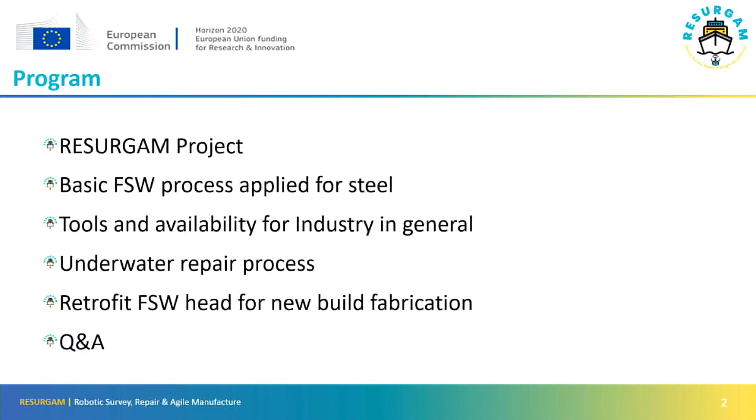So I'll start with the project overview. I did not present myself, but I'm from EWF. We are the project coordinators.

So the Resurgam project is more or less in the middle of activities. We started in February last year, and we are going through until the beginning of 2024. We have a budget a little over 6 million.

Basically, we are trying to come up with different solutions for the maritime industry. The idea is to pick up a process, the friction stir welding process, that was usually used in aluminum friction stir welding, and trying to diversify it for steel.

And also to have two different solutions for modular fabrication and also for repairs, both in dry dock and offshore. So this is quite ambitious. We already have some breakthroughs that we are starting now to really communicate and disseminate into the industry.

The project is mainly for the maritime industry. Nevertheless, all the developments, both in technologies and solutions, could easily, I think, be translated into different industries. We have the automobile industry here. We can also think about different applications for other industries, and in the project business plan after the project, we are considering different industries as well.

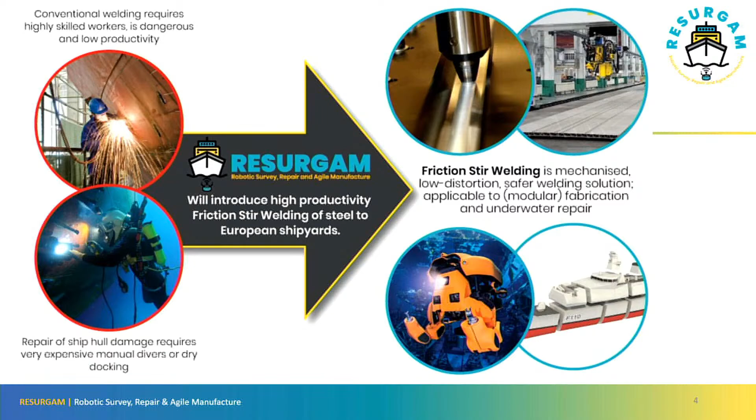We also have GISBIR. We have two participants from GISBIR here today, from the Turkish Shipbuilders Association. We also have the Spanish Shipbuilding Association in Galicia, which is ACLUNAGA. And then we have research organizations also present here: TWI, very well represented by Stephen, Lancaster University, Limerick University, and Delft University, also with a member present here.

And then, because this is for industry, we have Ford with Chris, Element 6 (unfortunately not here), ESSI from Greece and Cyprus, and also Stirweld with Pierre here, who is also going to present a little bit about the company. So the main challenge for the project.

The ongoing competition from shipyards around the world, mainly with new players from Asia, and the shipyard repair processes that are still expensive, require highly qualified personnel, have high-risk procedures, and are often inefficient and time-consuming.

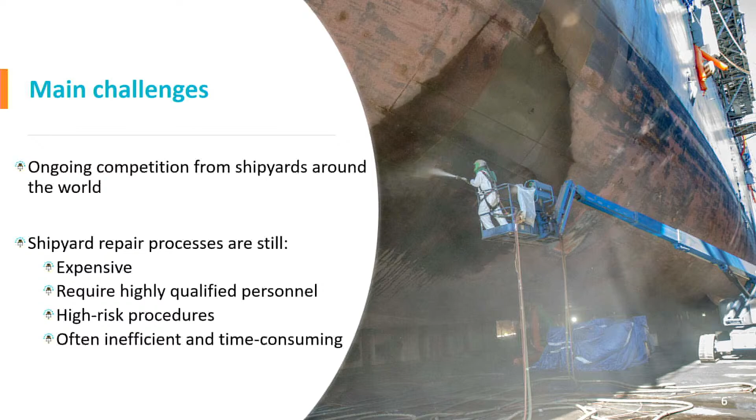So we have work to do. As key objectives in the project, we are hoping to enable the use of friction stir welding for underwater and under-oil welding of steel. By the end of this presentation, you will all know what FSW means.

Deliver a prototype underwater FSW head capable of robotic deployment - which we are not going to present today, but in the upcoming months it will be a reality. And an artificial intelligence enabled robotic underwater FSW system capable of performing inspection and friction stir welding underwater and in confined spaces, which could also be important for different industries.

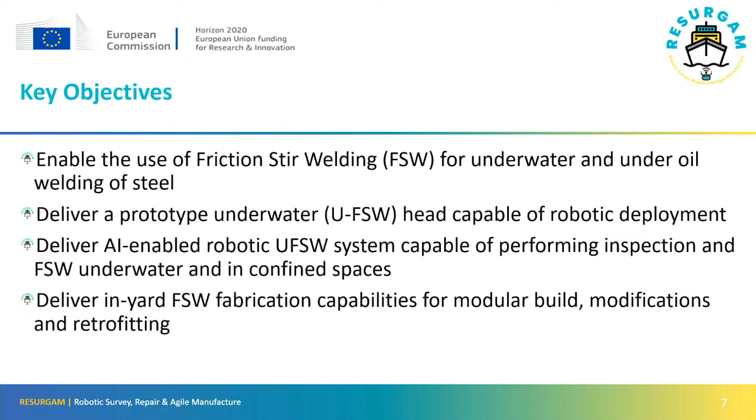And deliver an in-yard friction stir welding fabrication capability for modular build, modifications and retrofitting, which will be covered in more detail in the last presentation from Stirweld.

The outcomes of the project: so in a year and a half from now, we should be able to adapt friction stir welding to a new medium, the liquid one, and a new material, steel, instead of aluminium. The Resurgam digital platform to have some control of the process, mainly in offshore processes.

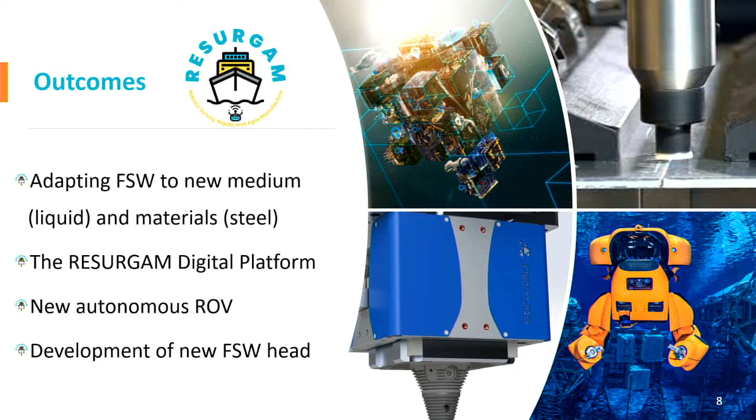The new autonomous robotic ROV, the robotic vehicle, yeah. And the development of the new friction stir weld head that is able to connect with a CNC machine in any shipyard and enable modular fabrication or maintenance repair of some kind of injury. So this is my presentation, a brief overview of the project.

We are now going to proceed with Stephen, who will kindly present the TWI presentation and also the Element 6 presentation. Stephen is a principal project leader at TWI, our expert in welding, friction stir welding to be more exact. He is a materials engineer and also a composites engineer. He is a fellow of the Royal Institute of Navigation, an associate of the Royal Institute of Naval Architects, and an associate of the Welding Institute.

So, Stephen, would you like to proceed? We are going to start on a high note with a video. Yes, watching a video is more interesting than listening to me.

So, a brief introduction to TWI. TWI is the Welding Institute, a professional organisation that maintains standards for welders in England and provides training courses - very much like the Institute of Engineers here. But in addition to that, we also have a research arm, with over 600 staff who specialise in materials engineering and welding research. So we actually do get our hands dirty at times and do some work.

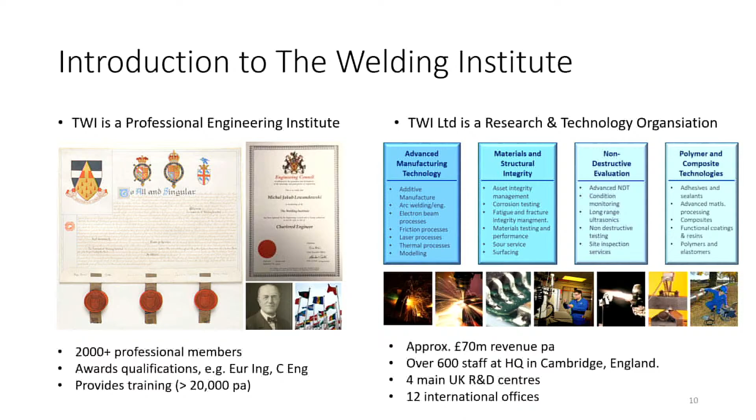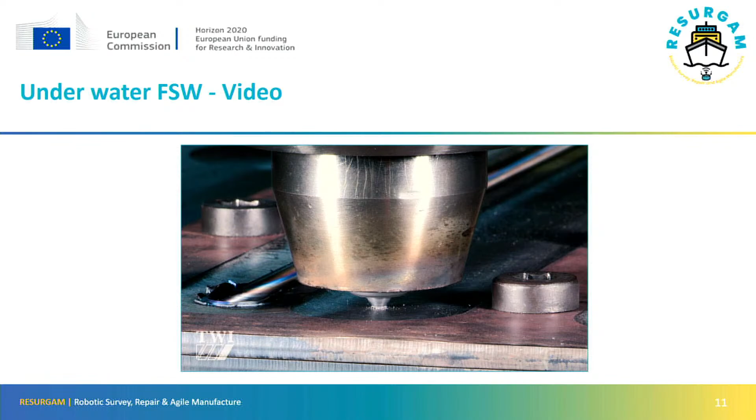So this will explain to you what friction stir welding is. Friction stir welding is a solid state welding process, originally invented by TWI in 1991 and widely used worldwide for the manufacture, firstly, of aluminium, then magnesium, copper and titanium fabrications. Under the Resurgam project, the process is now being further developed to enable the welding of steel for the European shipbuilding sector.

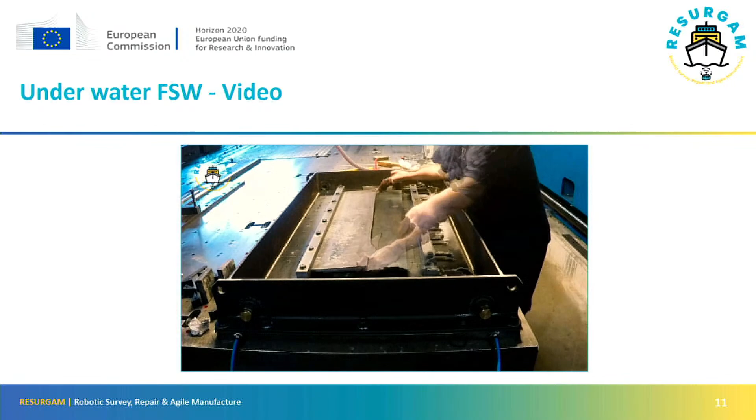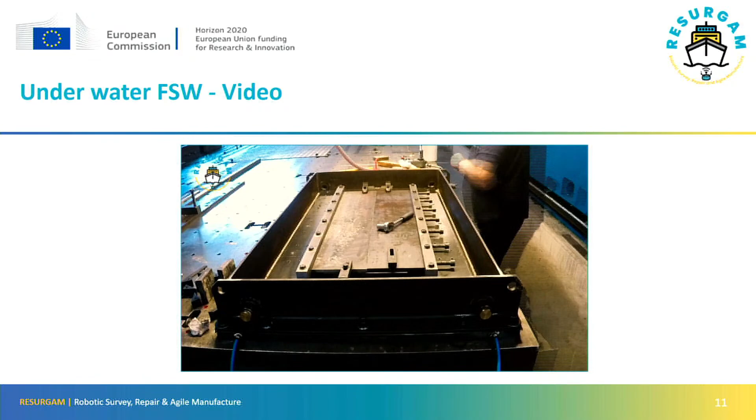In the short video running now, we see a test coupon of 12mm thick carbon steel being butt welded from two separate plates in TWI's laboratory. The steel plates are first secured side by side in the welding jig. The plates have simple square butting edges - there's no need to undertake a V-groove preparation for friction stir welding.

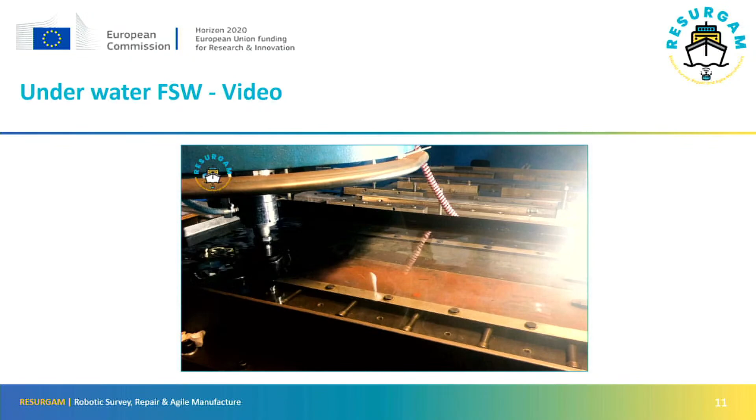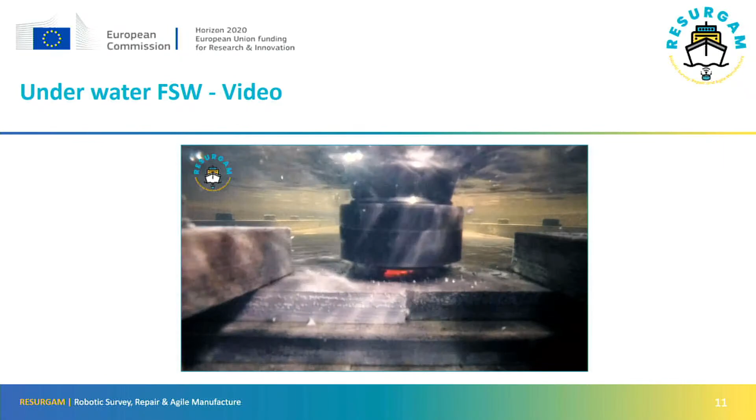The fixture is then flooded with water and the friction stir welding tool is brought down into contact with the plates. The friction welding tool is provided by consortium member Element Six and is being developed for welding steel up to 12mm thick, in air, or, as can be seen in this case, underwater.

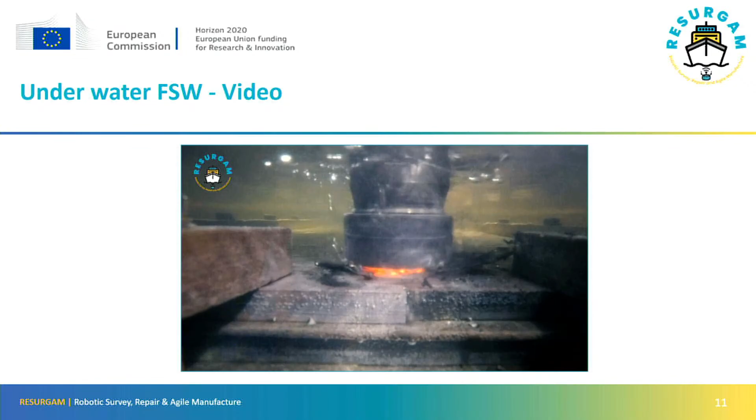As the friction stir welding tool rotates, it begins to generate heat, softening the steel immediately beneath it and embedding itself into the steel. Bubbles of steam can be seen originating from the contact area between the tool and the steel being welded. Once sufficient heat has been generated to soften the steel, the tool begins to traverse along the joint line, stirring the metal and joining the two plates together. Once the weld is complete, the fabricated test coupon is removed from the water tank.

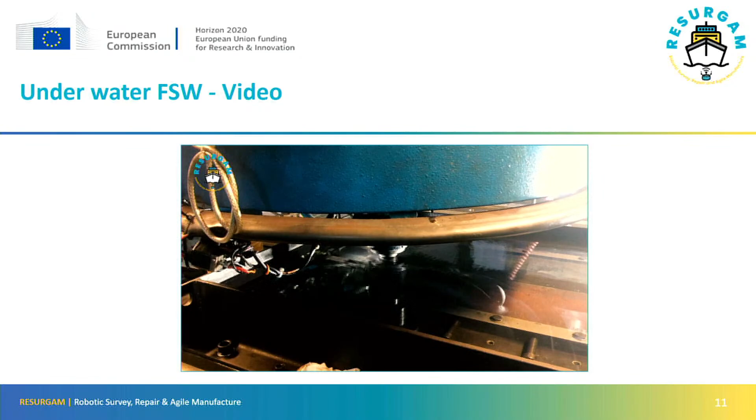As can be seen, the weld is smooth and free from spatter. The lack of distortion allows a 1 metre long steel rule to be balanced on its edge along the plate.

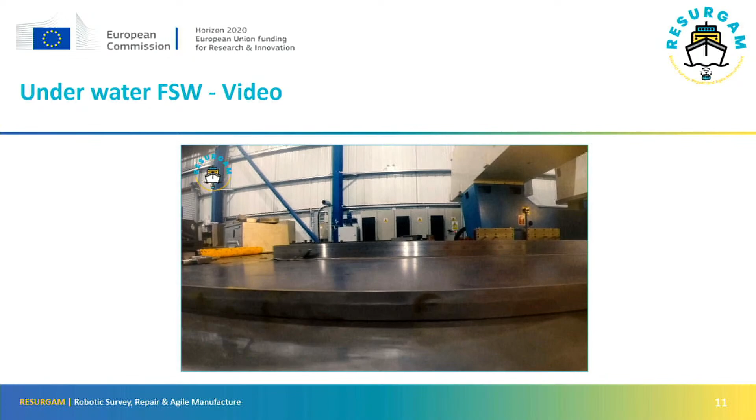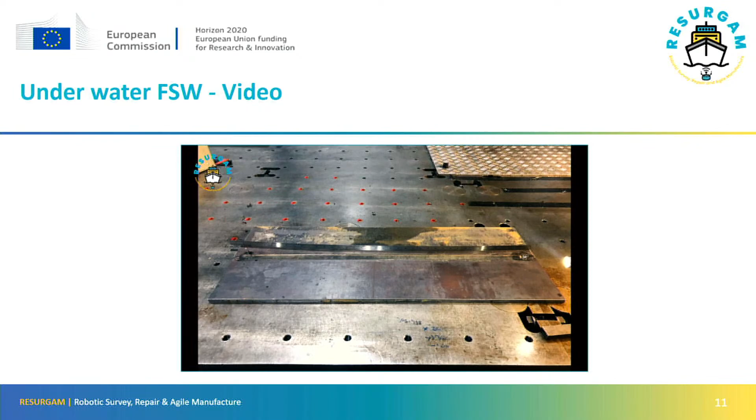A section cut through the weld shows it to be defect-free, with a fine-grained wrought microstructure. It is therefore perhaps unsurprising that tensile test pieces cut from the welded plate show the weld to be stronger than the original steel, all tensile failures occurring in a ductile manner outside both the weld and the heat-affected zones.

In conclusion, it can be stated that Project Resurgam has shown to date that carbon steel up to 12mm thick can be friction stir welded, and that this is equally possible underwater as well as in air. The process produces defect-free, strong, tough welds, ideal for a variety of shipbuilding and marine construction tasks, as well as repair. For further information about the project, please contact the European Welding Federation.

So that's friction stir welding in a nutshell. Basically, it's a process that was invented at TWI 30 years ago, but at that time it was invented specifically for welding aluminium, because aluminium is regarded as very difficult to weld. All that the process involves is we have a rotating tool, which is very much like a blunt milling cutter, that's lowered onto the surface of the weld area, and we then move it along.

It generates heat simply by friction, but the key thing is it does not melt the steel or the aluminium. It turns it into like a very soft state, but it does not melt it, and then it mechanically stirs it together. So a lot of the defects and problems you get with conventional arc welding or laser welding or even electron beam welding, you do not get with friction stir, because you're not actually melting anything. It's a mechanized process, so it's done by a machine, so you've taken human variability out of the process, and you get a very repeatable weld.

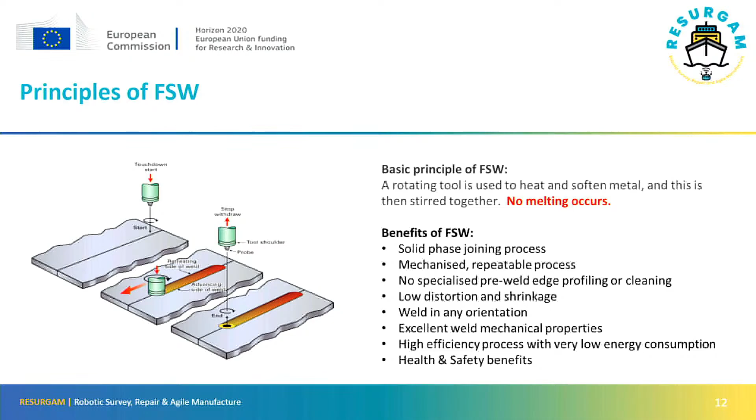As I said, it was introduced over 30 years ago, and it's probably one of the best kept secrets around. Most people have never heard of it, despite the fact that if you've been on a boat, a train, an aeroplane, or in a car recently, it was probably made with friction stir welding. But a lot of the companies that use it don't talk about it because it gives them such a huge advantage over their competitors. It's used in a lot of marine applications already for aluminium shipping, and people have said, we want that in steel.

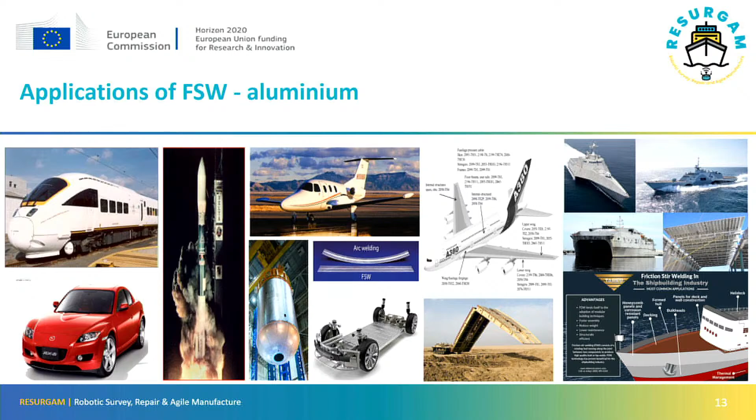After it was developed for aluminium, the process was developed for magnesium, copper and titanium, because those are also regarded as very difficult materials to weld. Friction stir can weld them quite easily. And the welds themselves are strong, they're tough, they're corrosion resistant. You can automate the process and take out the variability, so it's very good. So people said, we want to do that in steel.

We never envisaged using the process in steel because most people can weld steel fairly well. But once people started realizing that this would give better quality welds, they told us, you've now got to do it in steel. And part of the reason was the high quality possible.

So in these pictures, what you see is in the upper image, you see a typical multi-pass arc weld in 20mm thick steel. So you've taken the fine-grained wrought plate, passed an arc welding tool through it up to 20 times, and converted that microstructure to a cast microstructure. So you've probably got shrinkage defects there, you've got a large heat affected zone, you've got columnar grains. It is not as strong as the original parent material. In the lower image, what we've done, we've passed a friction stir welding tool through the surface of that weld.

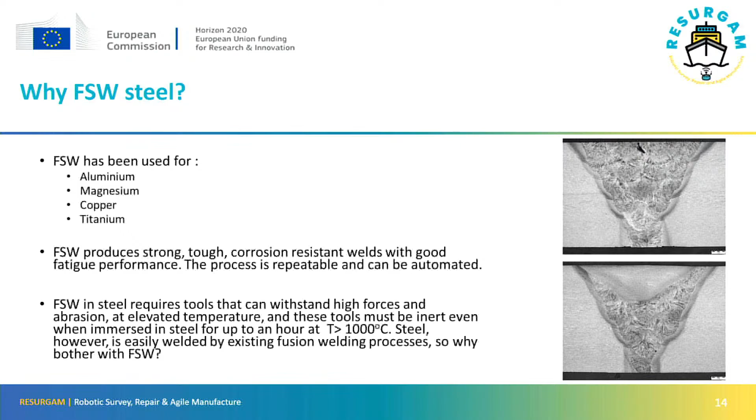If we look at that more closely, these images show on the left-hand side the parent microstructure of an S355 carbon steel, with ferrite and pearlite, and evidence of roll banding where the plate's been rolled. The micrograph next to it, at the same scale, shows the microstructure after friction stir welding. It's a complex microstructure with acicular ferrite, ferrite, pearlite, some elements of bainite and even martensite, but a much finer grain structure.

What we're finding is that's giving us the benefits of all those different structures. We're seeing the toughness of acicular ferrite, the strength and hardness of martensite, all blended together, giving us a tough, strong, very good weld.

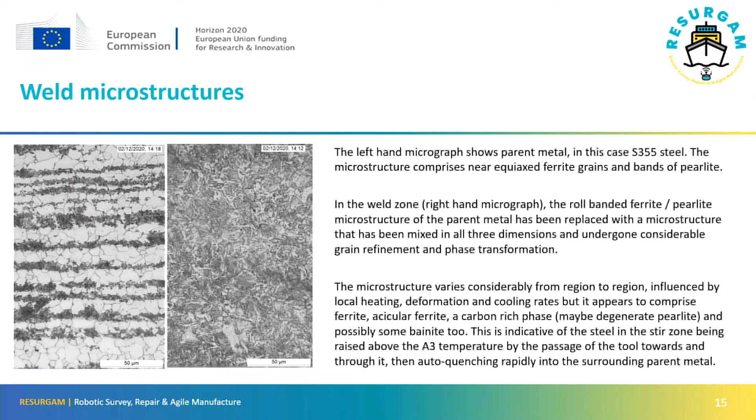We can also change that microstructure by varying the rotation speed of the tool. We're effectively governing how much heat we put into the weld, and by changing the speed at which we move the tool, we're changing how quickly we quench or cool it. So if someone wants a weld optimized for toughness, we can use one set of welding parameters, and if someone wants to optimize for hardness or strength, within limits, we can optimize the weld to do that.

This shows some of the work we've been doing. We've been taking large plates of steel, making a friction stir weld down the middle of them, and then cutting those up into test pieces, which are being tested for strength, toughness, elongation, hardness, and some are now being tested for fatigue as well. What we're trying to demonstrate is that the properties are consistent along the weld from beginning to end, and also determining what those properties are.

The image also shows that we've done welds in plates where we've prepared the weld zone carefully, cleaning off any oxides, paint, and rust. But we've also welded plates where we left the rust, oil, and all kinds of contaminants on them, to find out if this process is something you can use industrially without having to spend a lot of money making sure your work pieces are perfect. What we're finding is that the welds we've made in dirty, rusty, oil-covered plates are just as good as those made in a plate that's had the edges milled.

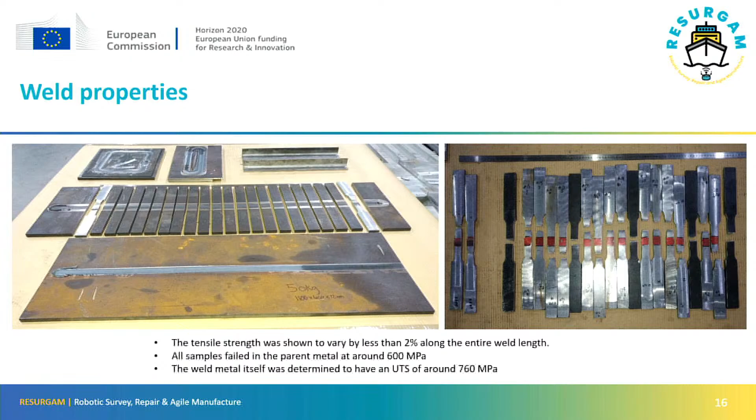We've also looked at how tolerant the process is to defects. In theory, if we do our job properly, we will never get a defect in a friction stir weld. But there will always be an occasion where someone programs the machine wrongly or does something incorrectly, and you can get a defect. And those are the welds that the classification societies want to know about.

Yeah, they're not worried about good welds, it's the bad welds that scare them. So we made some welds that had deliberate defects in them. This is a 6 millimeter thick plate, so we welded it with a tool designed for welding 5 millimeter thick material. So we were left with a 1 millimeter unbonded region at the root, which is effectively a crack. We also traversed the tool far too quickly, so the softened steel didn't have time to flow the whole way around it and consolidate against the sidewall. And that gave us a second defect at the top of the weld, again just over 1 millimeter in size.

And we then subjected it to tensile testing and fatigue testing. And as you can see from this section through the test piece, the failure occurred here in the parent material. So despite having two 1 mm long cracks, it was still stronger than the parent material. So it shows that the process can be very tolerant of defects. Obviously, you'd never want to put a weld like that into service, but if one day one did get into service in that condition, it probably wouldn't be a problem.

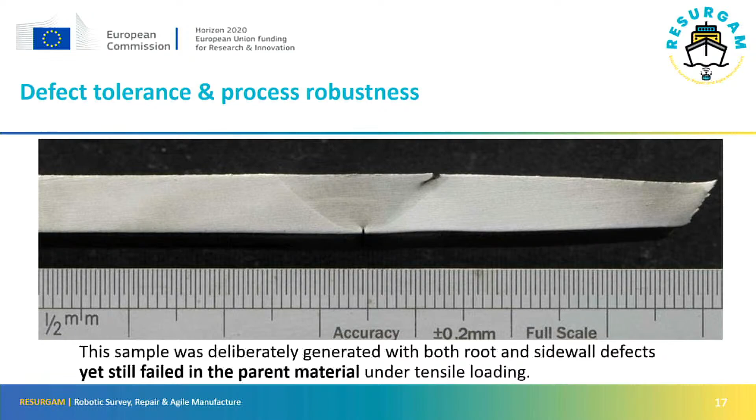We can do most weld geometries. The one weld geometry that we cannot yet manage in steel is a fillet weld. We're working on that. We can do fillet welds in aluminium, copper and titanium. It's just a case of adapting the tools and making the tools better. So we should get there eventually, but at the moment we can do all these weld geometries, but not a straightforward fillet weld in a corner. But that will come in time.

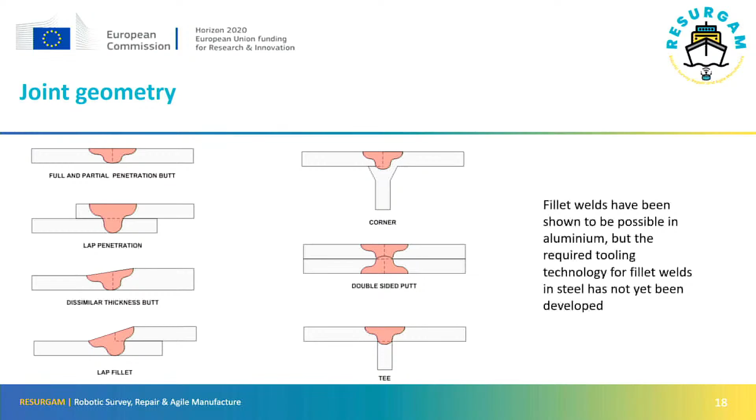What we've been talking to some shipyards about is, if you can't do a fillet weld, is there a better way of actually making something like a stiffened panel? So instead of getting your large plate of steel and then fillet welding stiffening ribs onto it, why not start with a rolled T-section, so you've got a forged structure to begin with, and then weld those by spacing them apart using plate, and you can then vary the spacing as you need.

So effectively what you're doing there is replacing what could be a defective fillet weld, and there we can see a fillet weld with defects. You're getting rid of that process and you're replacing 2 arc welds with 1 friction stir weld. So you're halving the number of welds you make, and these are forged welds rather than cast welds. So potentially you're ending up with a fully forged structure, much less deformation, and potentially stronger. And we've talked to classification societies such as Lloyd's, and they say there's no reason why this can't be done.

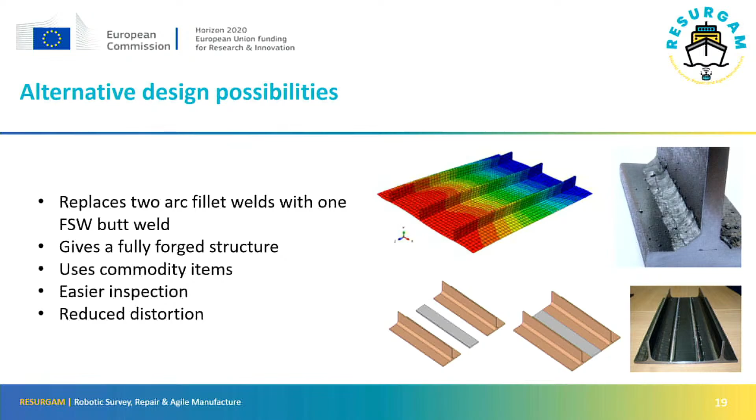One of the big problems we've faced with transferring the technology of friction stir welding from aluminium, magnesium, copper and titanium to steel is actually developing the tool to do it. Because what we're actually looking for is a tool that can stir steel. And that steel is at about 1,000 degrees centigrade. And if you think about it, there aren't many materials which are stronger and stiffer than steel at that temperature.

Because the tool's rotating and being pushed through the metal, it sees quite high bending stresses and fatigue loads, and again, a lot of materials can't tolerate that. We're also embedding the tool in iron, because steel is iron, at 1,000 degrees, and at that temperature, iron tries to alloy with anything that you put into it. So the iron itself, or the steel, is trying to dissolve your tool as well at the time you're working. It's also got to be non-toxic. One of the very few materials in the periodic table that is strong and stiff at that temperature is quite toxic to humans, so that got ruled out.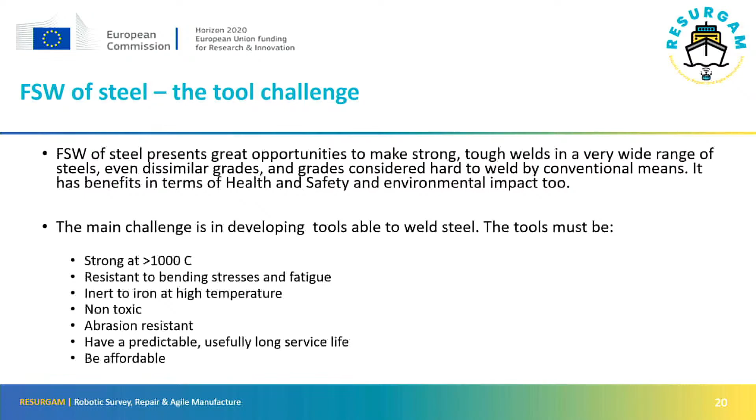If you think about the amount of abrasion going on as you're rotating a tool and pushing it through steel, that will wear very, very quickly. It's also got to have a useful and predictable life as well. A lot of the early research was looking at ceramics, because a lot of ceramics can withstand the temperature and they can be inert to iron at that temperature. But they don't like rotation, they don't like bending stresses, and they don't fail predictably. And the last thing you want to do is break a tool halfway through your weld.

And finally, it had to be affordable. One of the materials that people considered for using in friction stir welding tools was iridium. It's got the temperature performance, you can make strong tools out of it, but it costs more than gold. So are you going to use that in an industrial process to try and weld steel? Very unlikely. So the process works.

We were always convinced we could get it to work under water and under oil. The real difficulty was coming up with a tool that could actually achieve that. And that's where Element Six came into the equation.

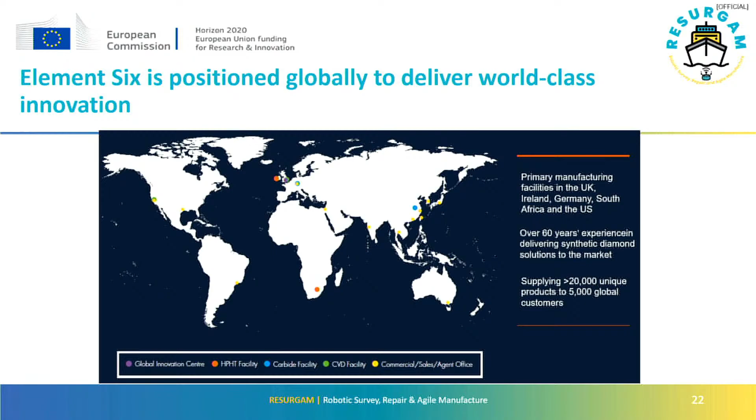This explains how Element Six started looking at developing a tool that basically was made of unobtainium. Element Six are part of the De Beers mining group. Their gem arm usually is referred to as De Beers, and their industrial diamond and industrial tools division is Element Six. They're a global company, worldwide, and they've been developing materials for the mining industry and the cutting tool industry for over 60 years.

They basically said to us, we think we can come up with a tool material that won't wear out, won't dissolve, won't break, and is relatively cheap enough to use industrially. We were slightly sceptical because we've had lots of people tell us that in the past. And they said, no, we can do it. So they set about doing it.

One of the materials in their portfolio are super abrasives based on polycrystalline boron nitride. They take boron and nitrogen, put them in a press, subject it to an immense pressure and heat it up at the same time. They explain that if you imagine putting those materials into a small canister the size of a tin of baked beans, then turning the Eiffel Tower upside down and balancing it on top of that tin, that's the kind of pressure they used to manufacture their polycrystalline boron nitride.

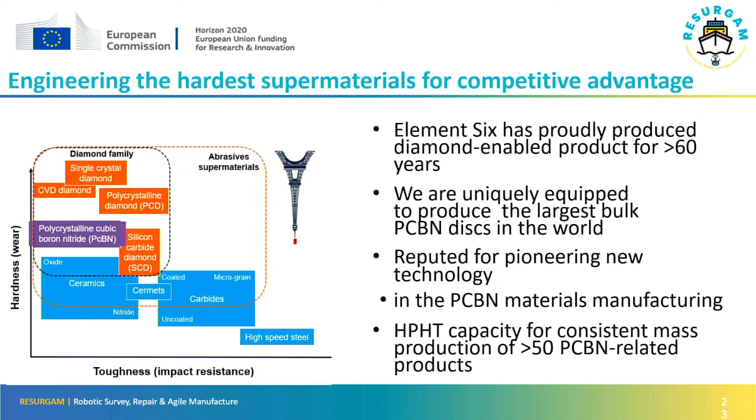So they developed the polycrystalline boron nitride, made some tools, and made a family of tools designed for welding 6mm steel and gave them to us to test. The competing tools on the market at that time could typically weld about 5 meters or sometimes 10 meters of steel. And that was part of the problem.

You never knew how good that tool was going to be and how long it would last. Would you want to start trying to do a weld that was 10 meters long if the tool had a fairly good chance of breaking after only 5 meters? So one of the important things was to prove that Element Six's tools were consistent and broke in a predictable manner. We've not actually managed to break one yet, which is good news. We've tried.

At the moment, we've found that their tools designed for welding 6mm thick steel will last for at least 65 meters of welding, and they will go through 29 plunge cycles. That's where you drive the cold tool into cold steel, where you've got incredibly high forces and abrasion. The target was 30 meters of weld and 10 plunge cycles, so they've exceeded the targets quite easily. The quality of the welds was still good even after 60 meters of welding.

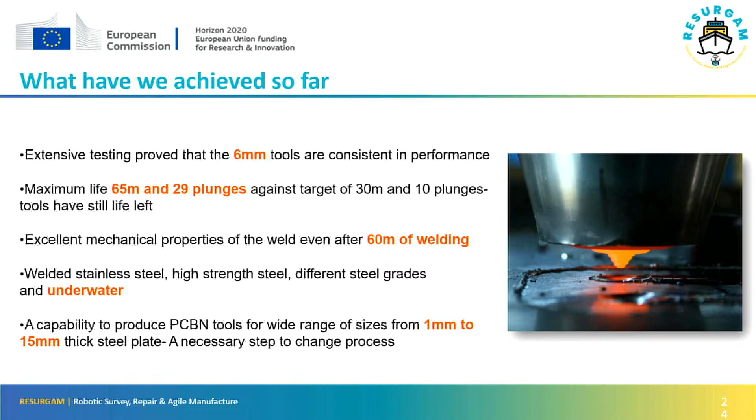Their basic plan is to develop a family of tools that can weld steel in thicknesses from 1mm up to about 15mm. If people want to go thicker than 15mm, if there's sufficient market demand there, they will be looking at meeting that demand. This shows the level of wear on some of their tools.

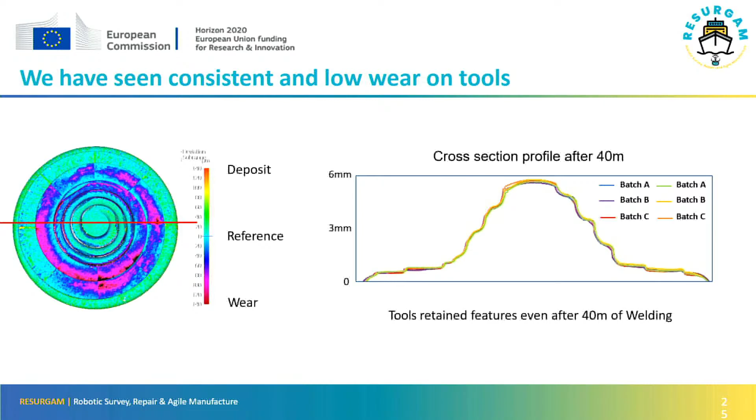So we took the tools, we laser scanned them to build up a 3D image of the tools. We then did several welds with them, scanned them again, made more welds, scanned them, and measured the wear on those tools. What we were finding was that even after 40 meters of welding, the wear was measured in microns. That was good enough - we could still make a good weld if the tool had only changed its dimensions by a few tens of microns. The competitor tools had worn out or broken at that stage.

What you can do with friction stir welding is you can actually use things like milling machines to do it as well. If you're not welding very thick material and the forces are low, I said that this process is like milling with a blunt cutter. You actually can convert milling machines to do this, which you'll hear about later.

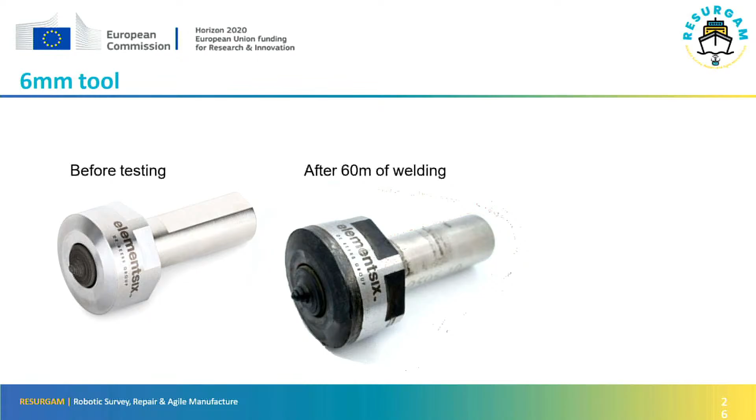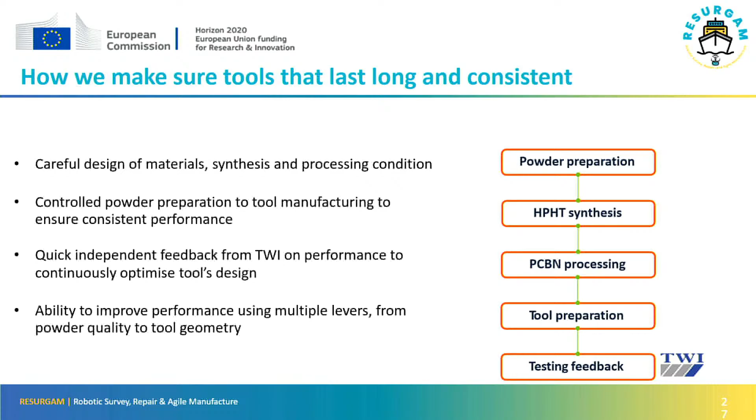One of the real reasons that Element Six are so good at making these tools is one of their major products is synthetic diamonds for industrial cutting tools. And as luck would have it, the process they use for making synthetic diamonds is almost identical to the process needed to make PCBN. So they've got all the techniques and knowledge in place to start out by identifying which powders they need as precursors, how to blend them, pressurize them, heat them, and convert them into tools.

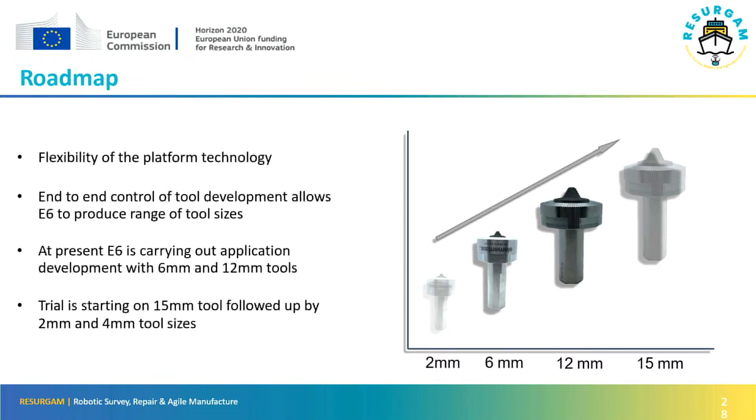So they really are a good partner to work with and manufacture these tools. We work with them, provide them with feedback, and they then reformulate the tools if necessary. As we've already mentioned, their aim is to have tools available to weld up to 15 millimeters of steel by the end of this project. We've actually seen that they've got a prototype 15 millimeter tool already, and we're only halfway through the project, so I don't think we're going to have any problems meeting that target.

So that's a quick overview of the basic process of friction stir welding and the tools that are used for it. So I'll now hand over to Chris, who will explain how we're actually going about welding underwater with these systems.

So we are now proceeding from the friction stir welding processes into the two outcomes of the project, one for the offshore and the other one for the dry dock. Chris is an operations manager at Forth Engineering. He has quite an extended experience in different sectors of activity, such as nuclear, oil and gas, marine, civil, and working with both the public and private sector. So Forth Engineering is in the process of developing an underwater solution, and Chris has a big challenge ahead of him.

Thank you very much. Thanks, Sarah. And thanks, Stephen, for giving us a good overview of friction stir welding, and hopefully you've all got to grips with that. So I'll give you a quick company overview.

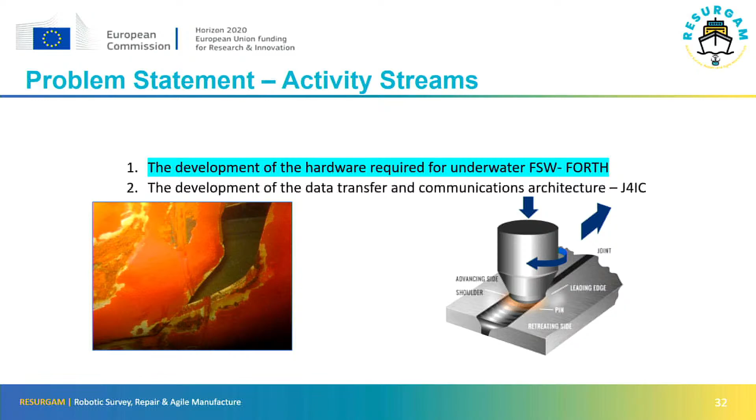There is another part of our work stream, which is the development of the data transfer and communications, and one of our partners, J4IC, are going to be heading up that bit, but our part is dealing with the hardware and making the hardware. So we have a number of challenges associated with that, and I'll try and take you through them because I think it helps set the scene and understand the challenges for the project in general.

First and foremost, as you've heard, friction stir welding is carried out in the horizontal plane, so you've got the use of gravity to give you that Z-axis, that plunge force that Stephen was talking about. We haven't got that luxury. We've got to do it in the vertical plane, which is difficult enough because we've then got to work out how we get the Z-force axis to start that weld.

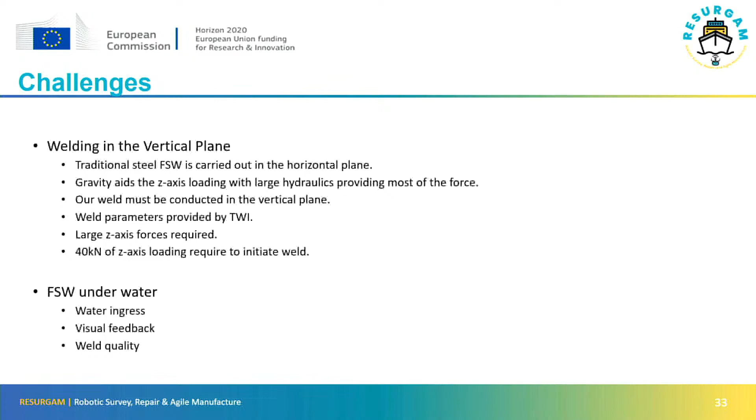So that's one challenge. We also have the weld parameters, which Stephen's worked really, really hard, and TWI have tried to reduce as much as possible for us. But we need about 40 kilonewtons of Z-axis loading force to initiate that weld, and in the vertical plane that's fairly difficult. Not to mention now it's underwater as well, so the whole machine has got to go underwater, which has its own issues — water ingress, visual feedback, weld quality issues that might come with that. Another challenge is the control, so we have to deal with X, Y, Z control, much like a normal miller machine or something of that ilk.

We've got to attach this machine to the ship's hull, or in this case for the challenge, a mock ship's hull, which I'll explain later. We've also got to control the speed of the tool and its linear motion. Everything will have to be marinized, and we've got to reduce the weight of the machine. So we need something strong and robust, yet lightweight. That gives us another challenge, but we're going to try and get around that with some neutral buoyancy.

And finally, as with any of these consortium-led projects, we've got logistics of working with people from all over Europe, which is fantastic. But this is the first time many of us actually met face-to-face in over a year and a half, so there are challenges associated with that, and chuck a pandemic in there as well.

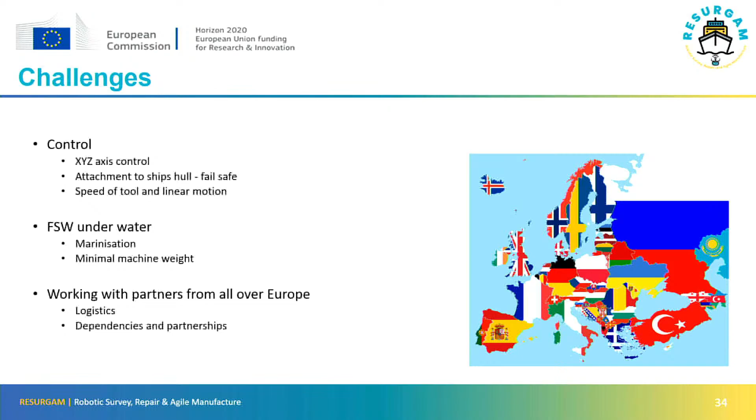So how do we actually do it? At Forth Engineering, we follow a fairly strict project life cycle, and we do this with all our projects, and Resurgam was no different.

The first part is optioneering, where we do a context analysis. We were given a grant agreement drawn up at the start, and we'd analyse what our challenge is within that. We then look at our functional means analysis - what are the functions that the machine actually needs to be able to complete and do?

After that, we go into concept selection, and the way we did that is we worked with 3 or 4 of our engineers and separate designers who were all given the same brief, and they would go away and come up with a concept on their own. That's to try and get rid of any sort of collusion and give us as much variability as possible when we came to choosing the right concept.

We would then pit these concepts against each other with a Pugh matrix, comparing the functional means - what the machine is going to do - against the non-functional means. So the nice-to-haves: is it easy to operate, is it easy to move, is it easy to attach to the ship's hull? It's actually those things that you are comparing, because you'd expect that after the concept design, those 3 or 4 engineers have met the functions. Each one of their concepts does do the functions. It's the other stuff that allows us to make it easy and hopefully take the project further into commercialisation.

Concept design is where we start our technical drawing using CAD drawings, and this also coincides with the design risk assessment to justify any design changes or decisions that go throughout the project. This is really, really important, because when we feed back to the consortium, we can explain our movements and why we've made certain decisions on certain technology choices.

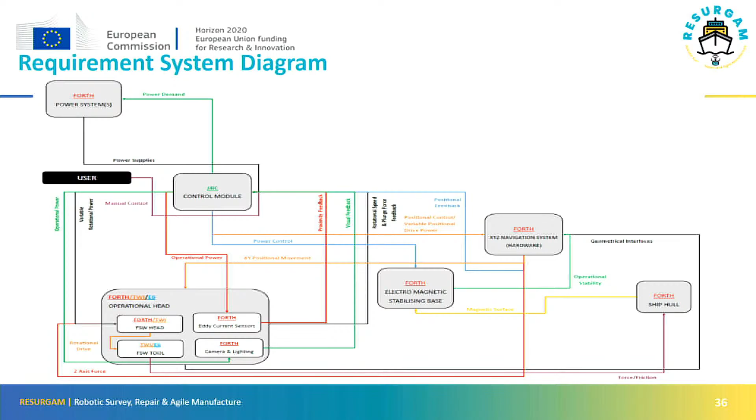We did this to try and understand the interdependencies between the partners, because one of our challenges is we've got lots of different partners in the mix.

One of the first things we wanted to do before we went into design was work with TWI to understand the parameters. I've got some tool parameters here - rotational speeds, it's got to be able to start up at 800 RPM and then drop down to 200 RPM. All of this allows us to choose our technology appropriately, and it means we're trying to get these parameters as low as possible to help our design. That's what Stephen and we challenged TWI to do, and they've absolutely risen to the challenge.

Like Stephen said, we're going to be conducting a lap weld, and we're doing it in 4mm thick steel with a 6mm tool. That means there'll be 2mm penetration into the parent metal.

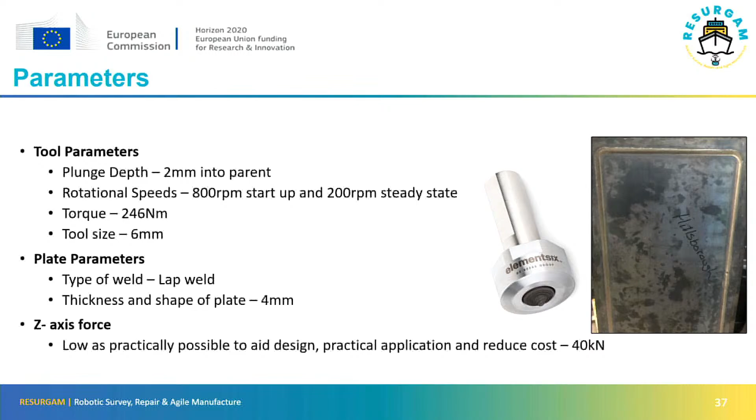The Z-axis force has been a bone of contention, trying to get that as low as possible to make it as easy as possible for us to design the tool, and we've managed to get that down to about 40 kilonewtons with TWI. We obviously have a factor of safety in there as well, which we'll have to use.

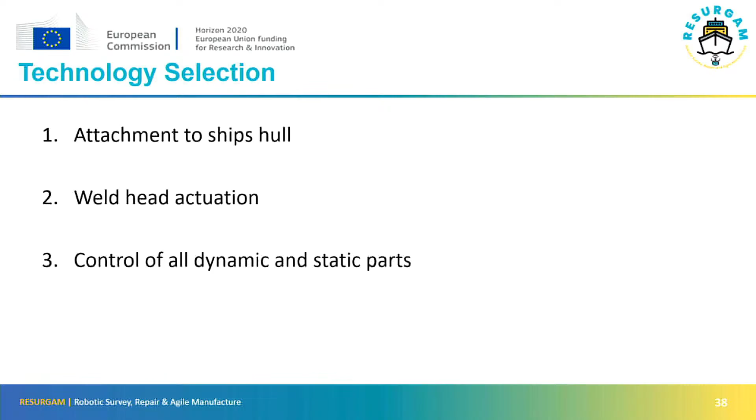So the three main things, as I mentioned, are attachments to the ship's hull, the weld head actuation - so the functions of the weld head itself - and the control of all dynamic and static parts.

For the technology selection, to attach it to the ship's hull, we've gone down the route of electromagnets, and that's part of what was in the grant agreement. We've done some testing with one of our supply chain companies called Rotary Engineering. Each magnet provides 70 kilonewtons of force, and when you see the design of the machine, it has to be able to cope with that Z-axis force of 40 kilonewtons plus 30 kilonewtons as the safety factor. At any particular point on its weld path, it has to still be able to do that, because otherwise you could get deflection or distortion, and we have to maintain a solid weld.

One of the challenges we had around the magnets is actually mounting them to the frame, and we've had to get some bespoke fittings made on the magnets themselves. Should this be taken further to commercialisation, that's also going to be a bone of contention, because the test we're doing is on a flat plate, but on a ship's hull it will start to be curved. It's not out of the realms of possibility, but it's certainly an extra part to think about.

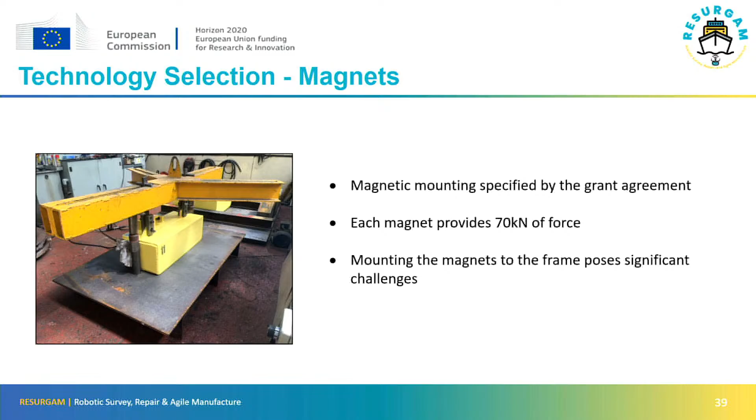So the next section was actually understanding how the weld head is going to move. Standard XY Cartesian systems such as milling machines are great, tried and tested in the horizontal plane, but in the vertical plane we thought there could be some deflection or distortion, not to mention there's quite a lot of functions involved, which make it complicated for control.

So we looked at some of the supply chain in the past, and we've looked at tracked mounting systems. This reduces the risk of deflection or distortion, but it allows you only to have a fixed patch size, which could be seen as a con. But we feel that you could have a number of these tracks, and once you've got a number of them, you could have a range of different size patches, allowing it to do so. We feel this will provide us with a tool that's strong enough to hold the weld head in place, but also as easy to control as possible.

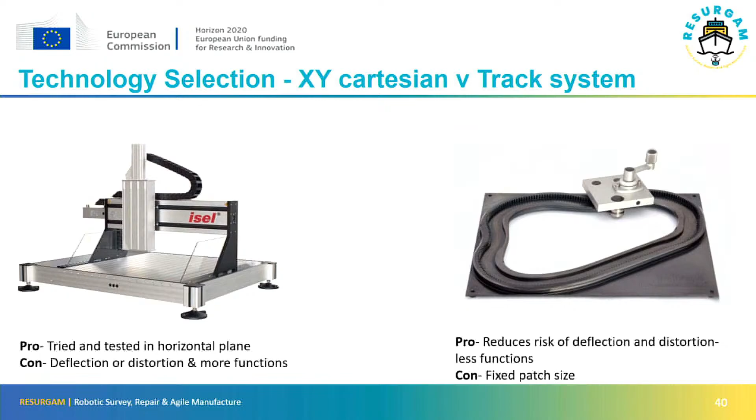The next thing was the technology selection itself around control and motors, and we went for hydraulic over electric because the optioneering process favoured that, and hydraulic pieces of kit are easier to marinise than electric pieces of kit. Avoiding electrics in water is always preferable.

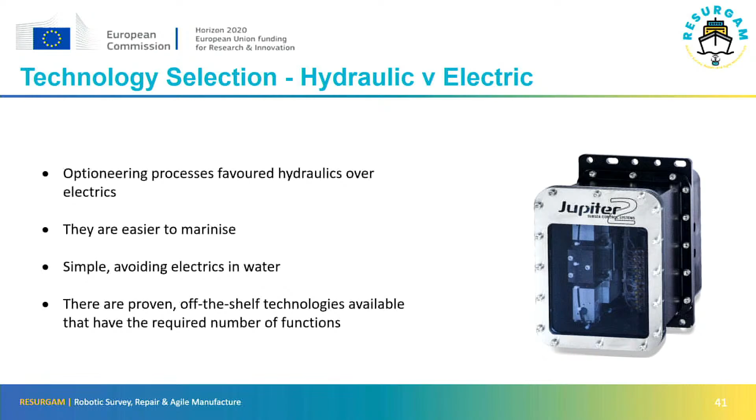There are also proven off-the-shelf technologies from subsea control companies that have spent millions of pounds and dollars to refine these systems. We've worked with this company before who have off-the-shelf bits of kit that allow us to have the right number of functions. In the context of all the challenges we've got, we thought that was one we could take away from ourselves and use some help with.

So as I mentioned before, it's going to be tested in the pond facility, and this is the pond facility where I'm from, back in the northwest of England. I think the actual pond itself is about 22 metres long, 10 metres wide, 6 metres deep, and it costs a lot of money to fill it up.

The drawing on the left-hand side shows the frame, which will go over the side of the pond wall. It'll have its feet on the floor on this side of the wall, and also feet at the bottom of the pond, to spread the loading because we're going to have a decent amount of loading with all the machines there, and we didn't want the pond wall to fall over, which was important.

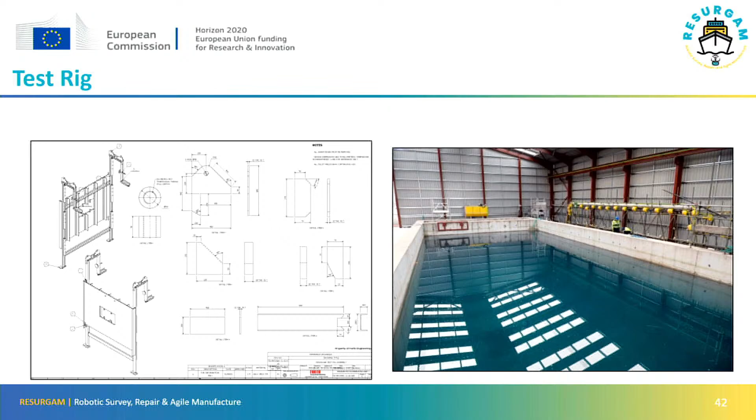On top of that, you'll have the mounting of the actual ship's hull, or the mock of the ship's hull with the damage, and you can see the hole on the plate there. That's mimicking the damage at the moment - the real damage won't quite look like that, but it was just putting some drawing together. Our machine will then have to mount to that.

This is the first view of our design - we're in the middle of detailed design at the moment, and I'll explain some of the problems we've had with that, but also some successes. So this is our welding head. You can see Element Six's tool at the bottom end here, right the way through your bearings and your shaft, right the way through your casing and into your hydraulic motor at the top end.

Now, one of the challenges we're facing just this week is the hydraulic motor. To get the parameters needed and the low speeds we need to actually move the tool, we're struggling with the motor that can do that. That size of motor currently in our design is quite small, which is quite nice to use, but the one we're currently looking at that can actually do it is a lot bigger, which may mean we have to change the design of the frame, which you'll see on the next slide.

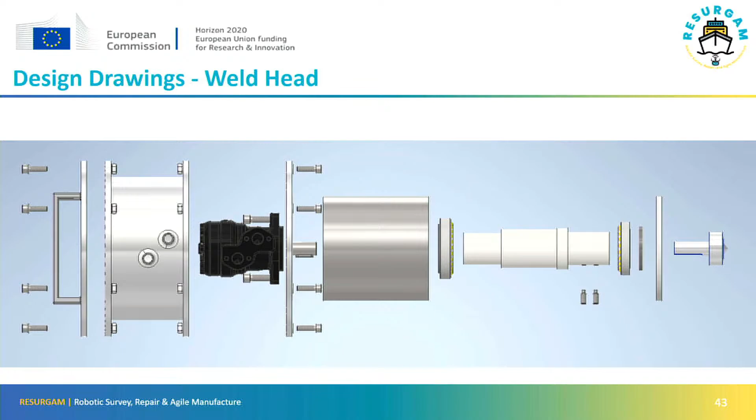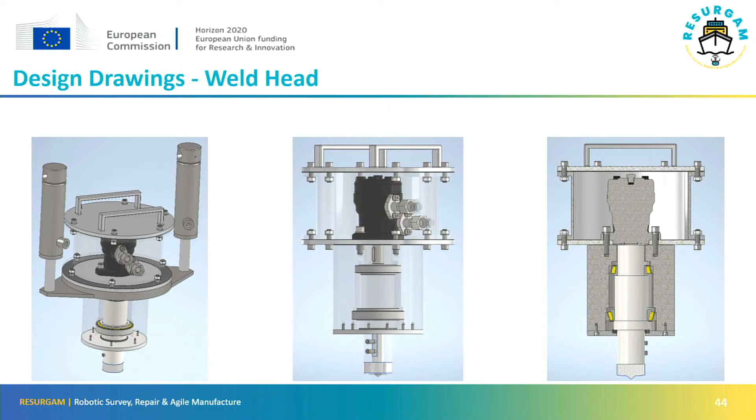This gives you a view of the head all put together. As you can see, you've got your motor there, you've got your tool at the bottom of the first image. You've got your two hydraulic rams being able to provide that Z-axis actuation force, and you'll soon see the magnet clamping facility which allows you to clamp against that.

This is the track itself. We've gone for a circular track which gives us more stiffness to be able to conduct the weld. We've got a mounting plate there which is driven around by a gear, marked on the second image with the blue gearbox. That's going to drive the head round the track. You've got your mounting plate there and the head itself just sits underneath it with the two rams in yellow.

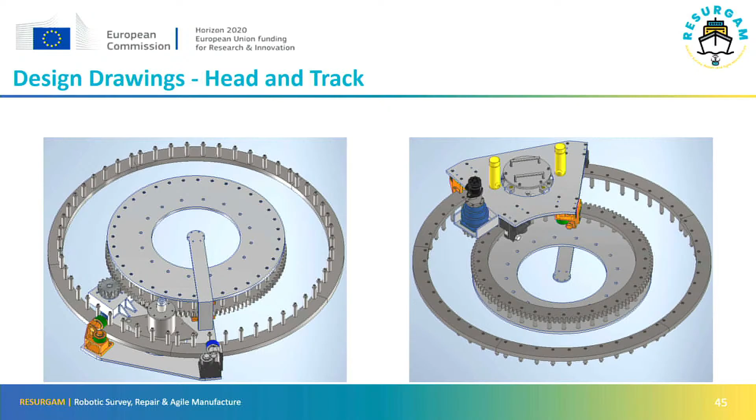We've gone for a circular weld because it makes it stronger and it was easier to run the actual tool around the circular track than around a rectangular track. We don't feel that makes any difference to the actual weld itself, and speaking to our colleagues within the consortium and the shipbuilding industry, we don't feel it's any issue as long as the weld goes right the way around that patch.

And this is the first concept or detailed concept design of our actual tool. So you can see there's 4 magnets there, each capable of producing 70 kilonewtons of force.

You've got all angles here, so you've got the underside, which is this picture closest to me here, and that's where the weld will be carried out with the tool going around the track in that distance there. You've then got underneath the plate there, which you can see the actual mounting and the gear driving that around the track. And then finally, you've got the plate on top with all the stiffening bars to make sure that the tool is as stiff as it possibly can be.

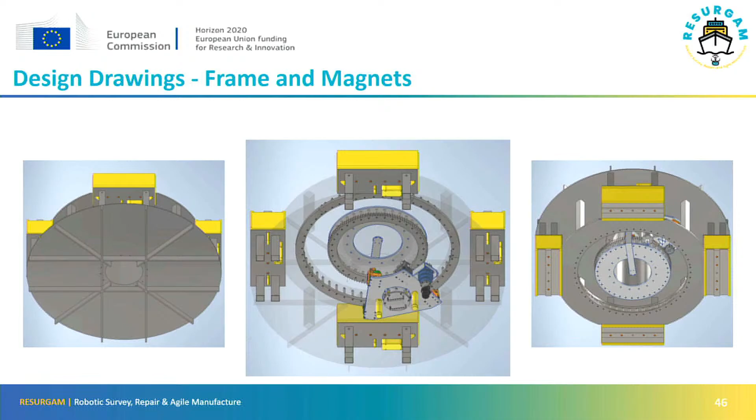As I said, we're currently in detail design. There will probably be a few changes to that, but that is pretty close to how it will look, I feel, going into the next 6 months.

So the next steps for us, we've got to go through our detailed design review and then our peer review with the rest of the consortium members, and then material procurement.

And with the world as it is at the moment, material procurement is becoming more difficult, and I'm in a really difficult situation at the moment with having to procure materials before we finish detailed design in order to try and meet the deadline of the project. But it's certainly a good position to be in, we're actually moving things forward quite quickly at the moment.

And then it'll be manufacturing it and testing it in January next year. So I hope that gives you a good insight into the actual tool itself. I'm sure there'll be some questions at the end, but thank you very much for listening, and I'll pass you on to Pierre.

Okay, thank you, Chris. As I said before, easy task, huh?

So we are going to hear now from Pierre Mas from Stirweld, a different solution. Less water, no need of magnets. A dry dock solution for an existing CNC machine in any shipyard available.

So Pierre is a mechanical and industrial engineer from Stirweld. And he does have a very important characteristic for this project, as we are from different countries around Europe. He already has previous experience as a globetrotter and he's a product engineer in Stirweld. So Pierre, thank you. Thank you, Sarah.

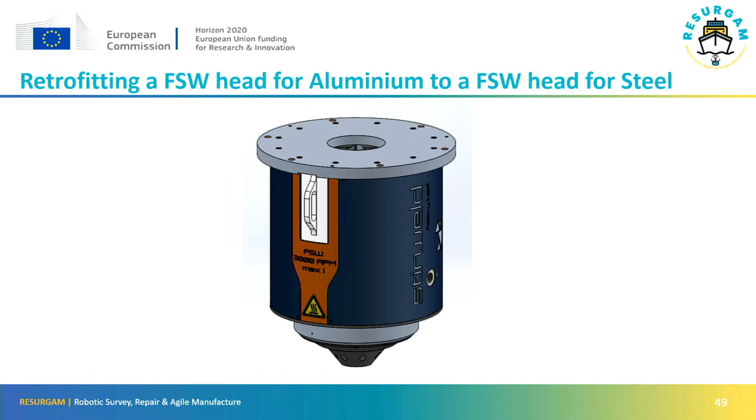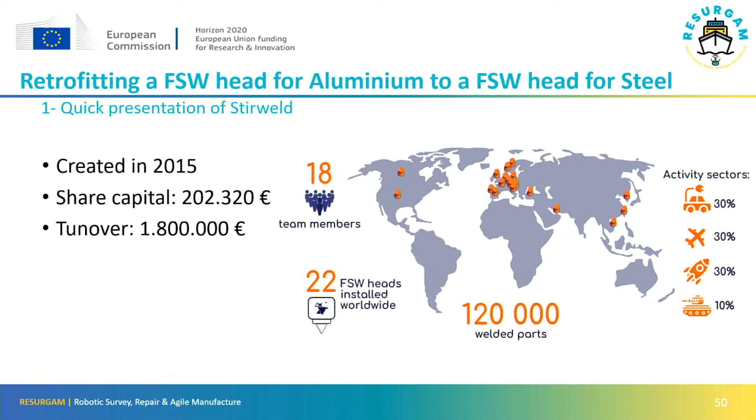So the main activities of Stirweld is to design and manufacture FSW heads for aluminum that are to be mounted on regular CNC machines. So the main idea for our clients who are interested in FSW for aluminum is to provide a product that turns a regular CNC machine into a FSW machine. So it's of course less money because you don't have to buy a specific machine for aluminum.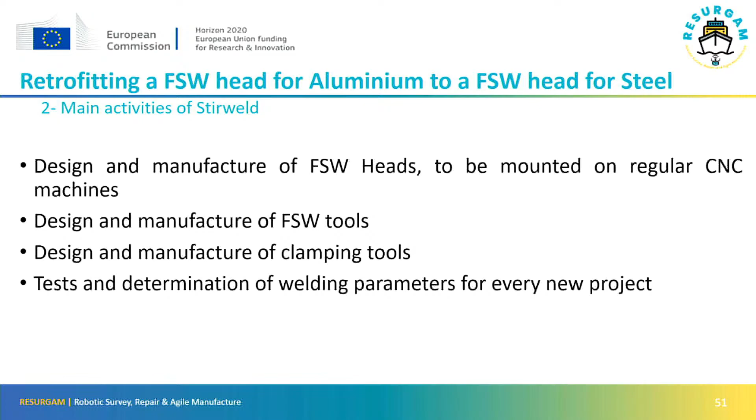We also design and manufacture FSW tools that are to be mounted on our FSW heads. And as we want to provide full support for our clients, we also design and manufacture clamping tools because, as Stephen said, there is a lot of forces involved in the FSW process. And we also do tests and determination of welding parameters for every new project because every FSW weld needs to be correctly parametered.

I'm talking about the rotation speed, travel speed. So we have 2 engineers that work daily on those tests to provide the best support for our clients.

Here are a bit of our references. So our main activities go to automotive and aeronautics, but we also have projects in space and renewable energy, as we weld gas tanks and those kind of things.

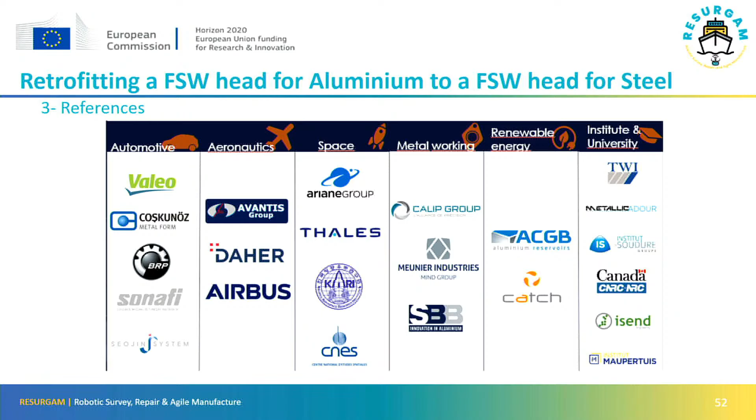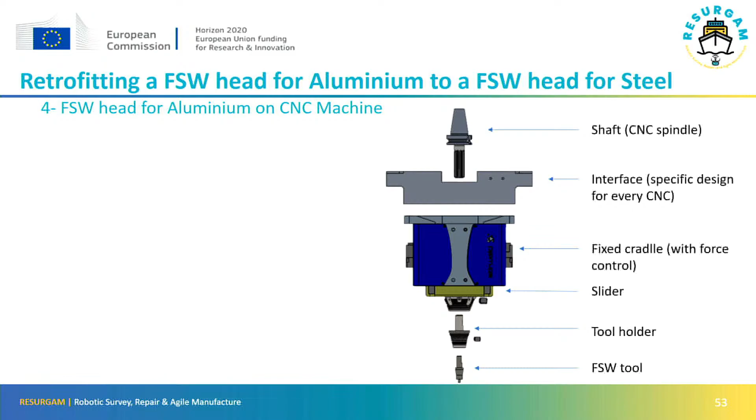So a quick overview of the state of art at Stirweld. Our FSW head is designed to be installed on any CNC machine. The rotation of the FSW tool is done by using the spindle rotation of the CNC, and we use a soft shaft coupling inside the FSW head to prevent any damage on the CNC spindle. We also design custom interfaces to fit any machine by keeping the head standard.

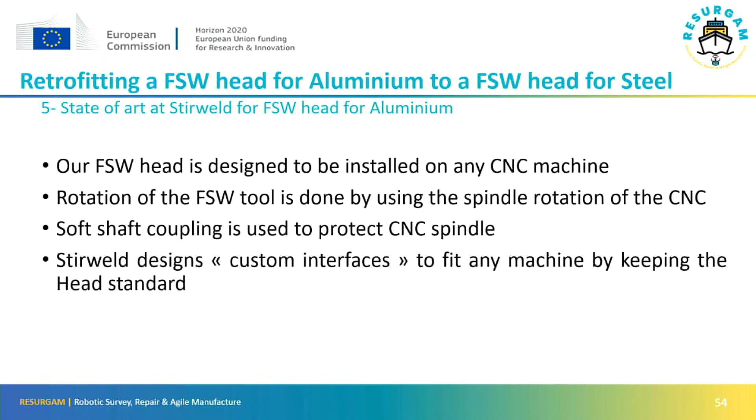As the temperature to weld aluminum in the FSW process is not really high, we just have air cooling on the FSW tool and very simple water cooling inside the slider.

So those are the specifications for the retrofit of the FSW head to a steel FSW head. The maximum force on the Z-axis we want to reach is around 50 kilonewtons, and as I said, the X and Y are proportional, so it will be increased also. The rotation speed will be lower than for aluminum, so we will go up to 3,000 RPM, but the welding torque is much higher, about 3 times the welding torque for aluminum. So it goes up to 150 Newton meters.

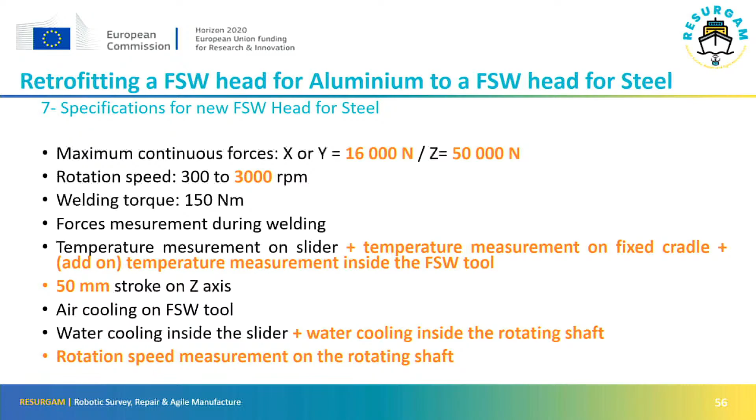Since 1 year now, on every new project, we develop a specific human-machine interface. We will also have rotation speed measurement on the rotating shaft, as currently we just use the info from the CNC machine.

This is the design differences between the two products. On the left side, you can see the differences in size. The small one is for aluminum, and the big one is the RESURGAM project, made for steel. You can see the FSW head for steel is twice as big as the aluminum FSW head.

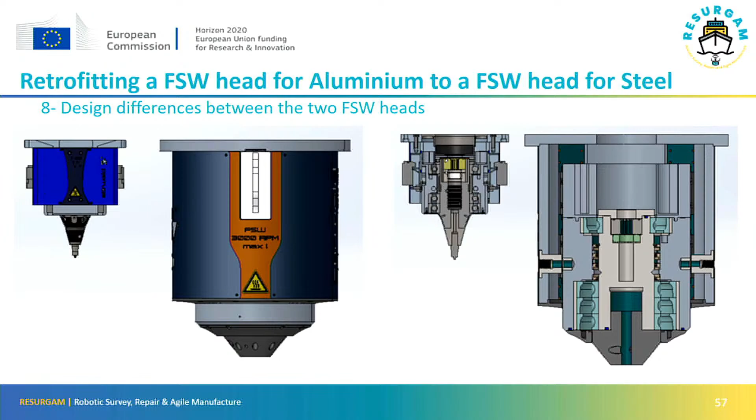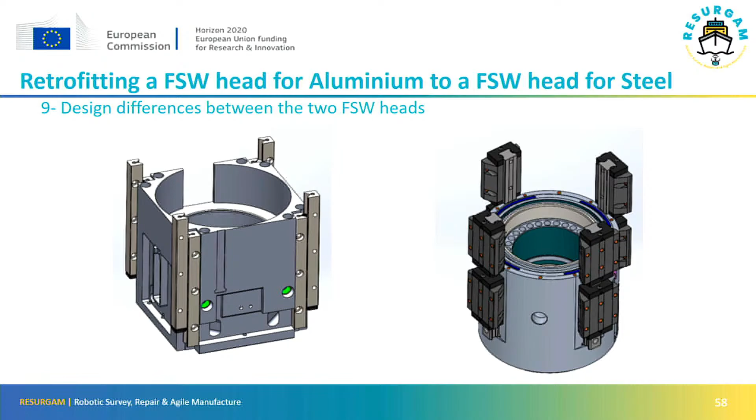So the main design differences beside the size are the sliding elements that provide the up and down movement of the slider. Of course it's not the same scale for the views, but you can see that we switch from a system with 2 rails with walls between them to a system with ball carriage and rails, which are much stronger.

So we use specific sealings, to make sealed chambers filled with water, and then the shaft rotates inside those chambers.

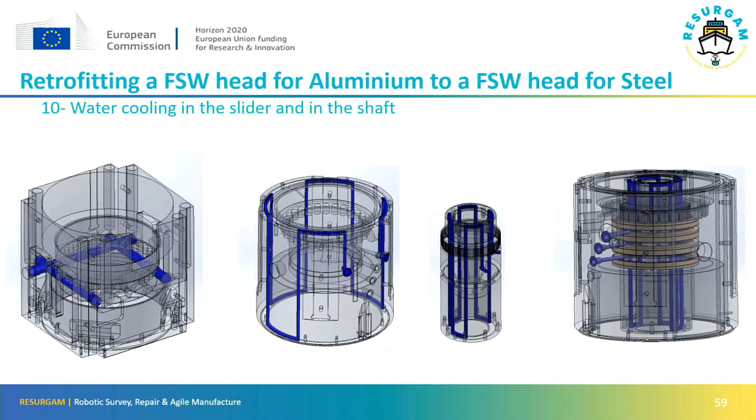So I mentioned the rotation speed measurement. This is quite simple, but we just machined slots into the rotating shaft and implanted a rotation sensor just in front of the slots.

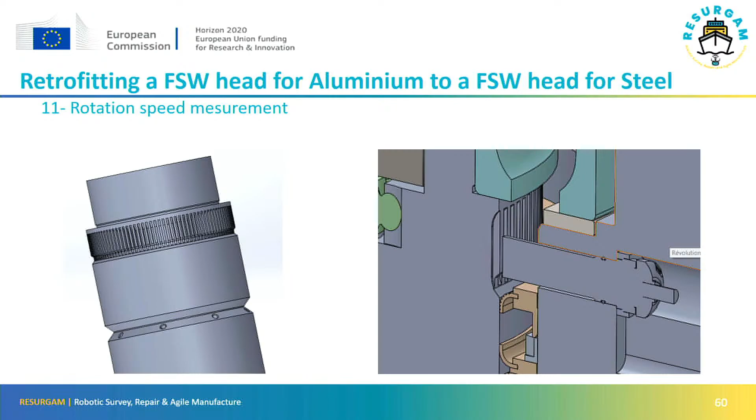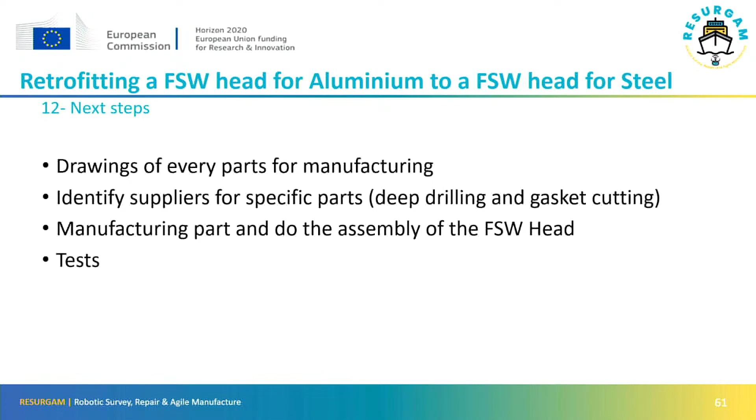So the next steps for this project: the drawings are currently being done for every part for manufacturing. We'll have to identify suppliers for specific parts, as there is deep drilling for the water circuit, and also gasket cutting. Then we will manufacture parts, assemble the FSW heads, and do every test and fine-tuning to make sure everything goes well.